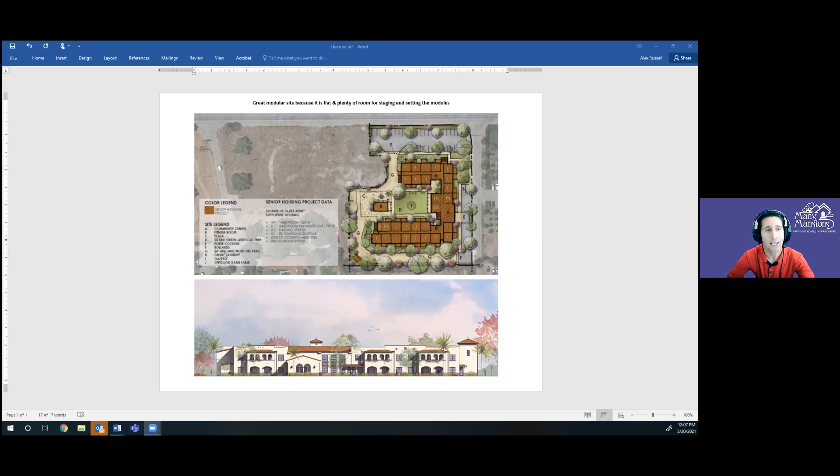There's a lot of things that we're still learning about it as we go. And part of that learning process has actually been working with Prefab Logic and Lana and her team, who are experts in the modular space and are really helping our team work through this process and make sure that we're successful. So I'll turn it over to Lana, and you guys enjoy the presentation.

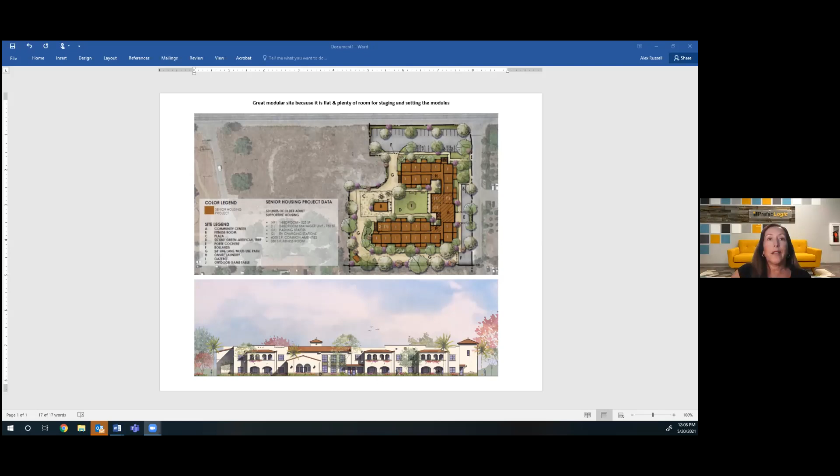Thanks. Lana, your turn. Okay, well, Alex already covered it all, so I'm done. I'm just kidding. Here we go. All right, can everybody see my screen? Am I sharing? Yep. Okay, good.

We use Teams, so switching over to Zoom, sometimes I'm a technology goofball.

So, okay, my name is Lana Cook. I'm with Prefab Logic. I'm the business development manager here. We are an Idaho-based modular pre-construction consulting firm. I am based here in Southern California. I am working with Many Mansions and a number of other folks on a modular project and modular projects.

And I'm just going to give you a little talk today about what it is, what we're doing, and sort of the progress of modular going forward.

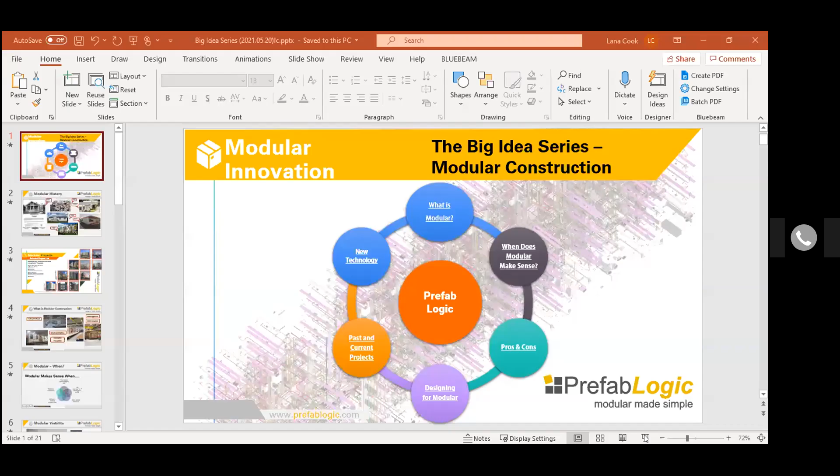So let me see why my pages aren't changing. Sorry, we're having a little technological issue. Are you guys seeing anything? Yeah, we see the initial screen. Yep, it is not changing. That's so strange. Bear with me for one sec, folks. Sorry. There we go. Okay. Hey, Alex, are you still screen sharing? For some reason, it won't release it to me. Thought that might be the issue, and I checked, and it does not look like I am screen sharing. But let me check. I have a red light. How's that? Oh, that's better. Or at least I can see. Yay. Okay. Are we good? First screen, are we good? First screen, yes. Okay, good.

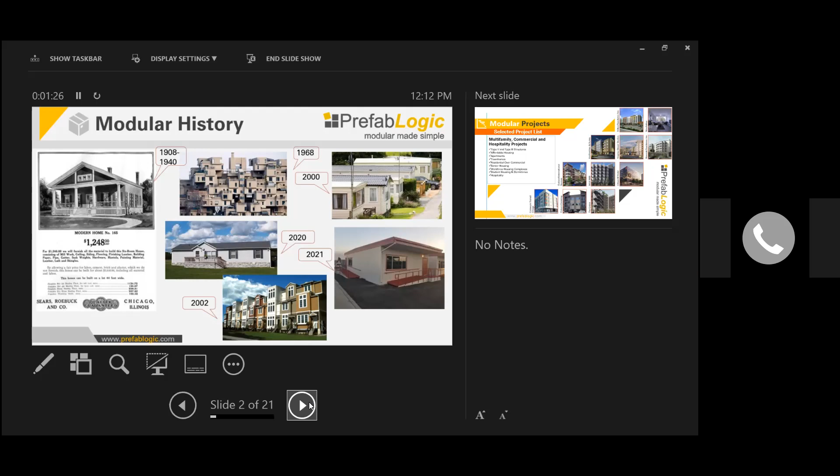That's current. And if you look way down at the bottom, that is a project that most of our team worked on back in 2002. Those are townhomes in San Jose that today sell for upwards of $1 million. So modular in the world that I live in today has been around for 20 years. So it's not new anymore, but the process is evolving and we're happy to be part of that process.

And so for what we do today, we've developed projects with clients that range from hotels to apartments to workforce housing, townhomes, slab on grade buildings, over podium, student housing, you name it, we've covered it. It's wood frame construction, type 5 and type 3. And really that means I can go single story to 5 stories over podium with this sort of volumetric mass produced product.

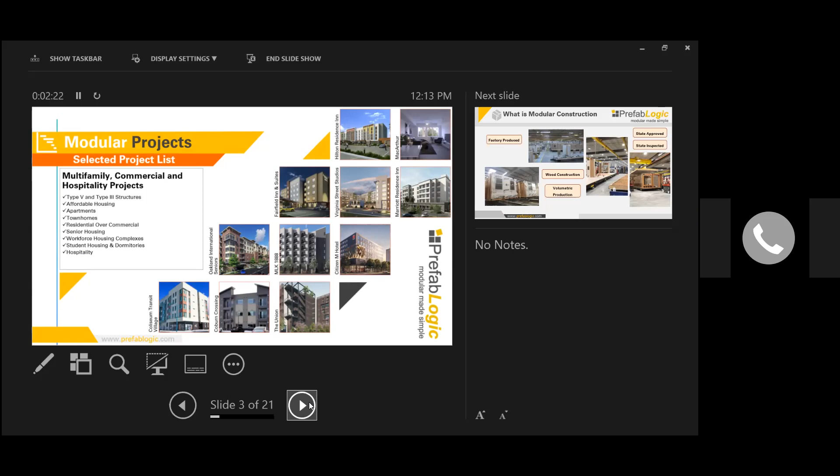So we're not talking about single family homes. We're not talking about manufactured housing for single family. We're not talking about panelized or kit products or SIP panels. This is truly a full 6-sided box, mass-produced type housing product.

So in terms of modular in my world, and we're all going to stay in my world today, this is a factory produced product that is under the jurisdiction of the state of California. So any state that the product is going into, the state is the jurisdiction. So the state does plan check and approval, and they do factory inspection and approval of the product as it's being built. Again, wood frame, and this is volumetric production.

So what that means is, kind of envision in the back of your mind the Coca-Cola plant, moving the Coke bottles through the production facility. All the Coke bottles are the same, and they're produced on various stations along the way through the production line. That's how this product is built.

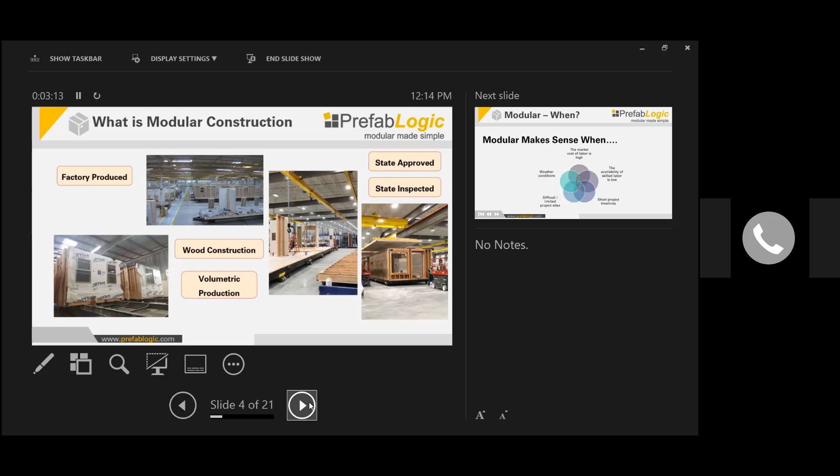This is not, we call it lots. There's a lot of slang terms for placing a module in the center of your plant and then bringing your workforce to that location, and then all of the workforce doing different trades. That's not this process. This is moving it station to station. And each station does one piece of the puzzle, so to speak. So volumetric production, wood construction, and under the jurisdiction of the state.

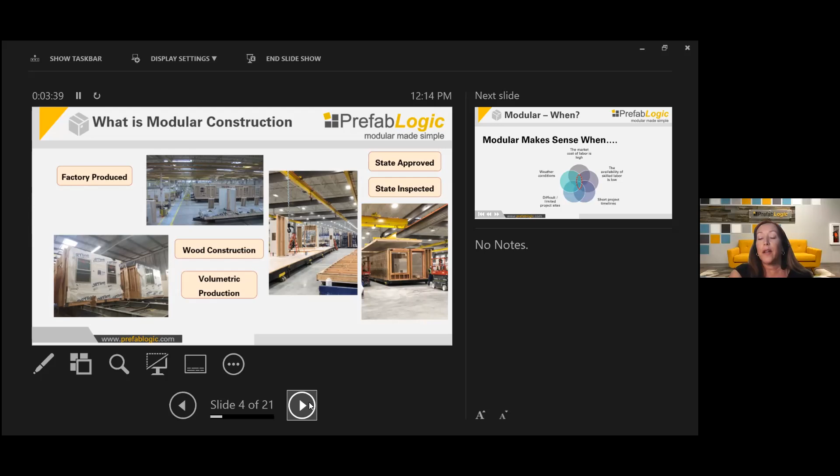So modular really makes sense when the cost of labor in the local market is high, and you want to make sure that there's a delta between the factory labor rate and the field market rate. Sometimes those are on par, but if you're looking for a cost differential, the biggest swing is the difference of the cost of labor in the plant versus labor in the field.

There's also markets where the availability of skilled labor is increasingly more challenging. And I can tell you that Salt Lake City is one of those markets where the boom of housing has surpassed the availability of labor in the market. So it almost doesn't matter anymore what the project costs if they can't find the people to actually build it. People have in their mind what things cost until there's no way to get it done.

So modular really makes sense where the availability of trades is limited, and we all know that after the recession, so many people got out of the trades, and we're now dealing, especially in Southern California, with a smaller pool of subcontractors. So when those subcontractors are all busy, modular moves some of that work away from the subcontractor and into the factory so that fewer subs are needed on site.

Modular also makes sense when project timelines are short. You have funding deadlines, you need to get vertical quicker. Alex mentioned getting housing in the market sooner, quicker. Modular is a huge part of that. The typical modular project shaves off about 1/3 of the schedule, and that's in projects ranging from 50 to 300 units. We can usually shave about 1/3 off the overall construction schedule. In addition to that, we can shave off at least 1/4, if not 1/3, of the actual pre-con schedule, which then is, if you can shave off a year of your whole construction project, it's a win all the way around.

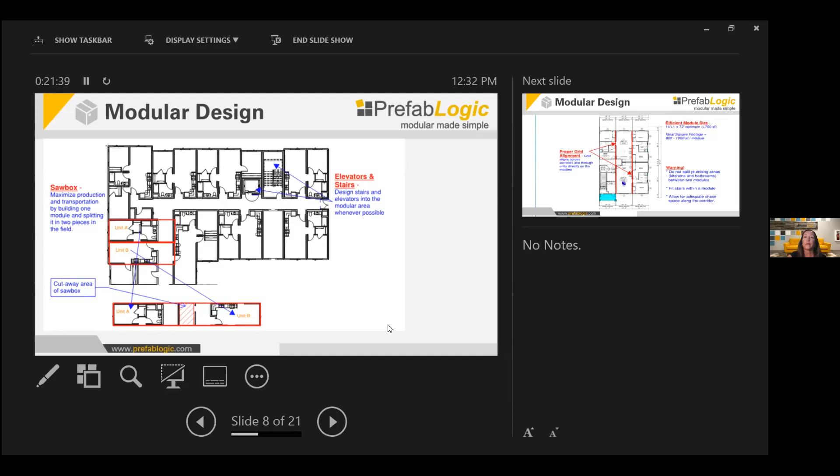And then grid alignment is key. Again, designing within that rectangular box, making sure plumbing like kitchens and bathrooms never fall within that magic red line you see on the screen. And making sure that, again, we're really focused on how is the factory going to build this? Do we have access where needed to align chases from floor to floor.

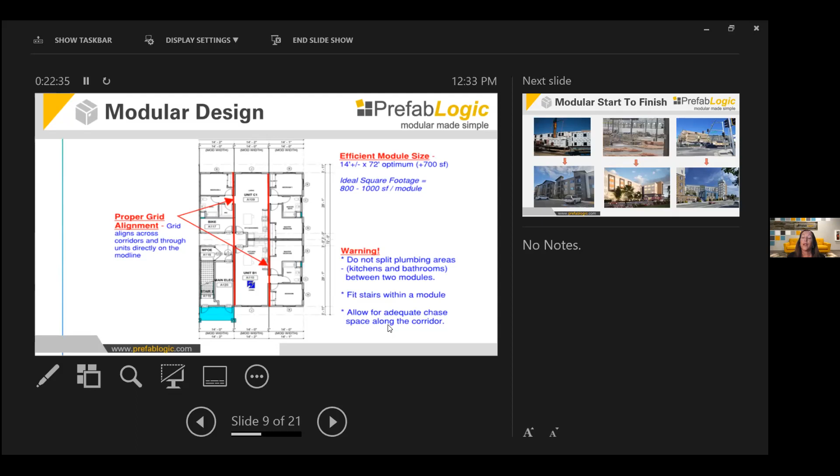There's things that have to be thought out much earlier in the process in modular because there's no tearing apart walls. They're all finished so that you can make a connection in the field. Or we missed a pipe and we've got to find a way to get it from one floor to the next. That doesn't happen in modular. We solve those problems early, but a lot of it stems back to design. So if the design is modular friendly, your economics will start to make a whole lot more sense and the project and the product will become much more efficient.

And then here's just a few projects in various stages. Across the top row, this is what a modular project looks like when it's going vertical and they're picking from the crane and putting each piece into place. Yes, the whole Lego theory is really true. And that's the units are finished on the inside. So these apartments, this is an affordable housing project on the left. Apartments are finished with flooring, drywall, tape, texture, paint, cabinets, counters, light fixtures, ceiling fans, appliances, and then the outsides are just about unfinished. The bottom picture is the completed project itself.

Balconies are built in. Everything we possibly can build in at the factory, we want to build in at the factory and leave as little to be completed on site as possible. The middle project is a view of apartments in an automated manufacturing facility before the framing pieces have started to be put together. So the robotics have already cut all the pieces. Each one of those stacks of lumber you see are either roofs or floors, and they're tied to specific units, which eventually, when they're all created and are stacked in the field, will look like the building at the bottom of the page in the center.

And then the picture on the right is vertical set of all the boxes on a project in San Jose that is finalized as far as the crane set goes. And in roughly 4.5 months, it's 301 units. It'll look like the picture at the bottom. And that project's underway today.

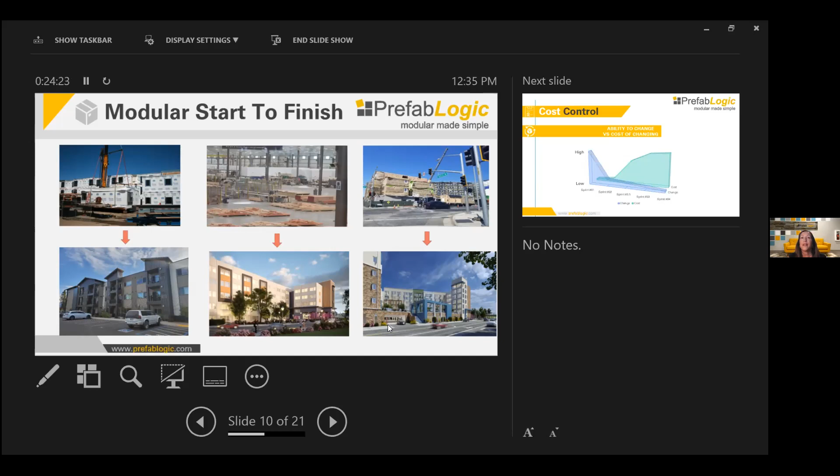And then modular, as I think I mentioned, there's no design build. And I know that every once in a while somebody slips past me and goes, oh, but you can do this. But really in modular, we want to plan in advance and decide and pick colors and specs and get to design lock early so that so many of the other things that happen behind those items can get handled more quickly than they would if we were making changes late in the game.

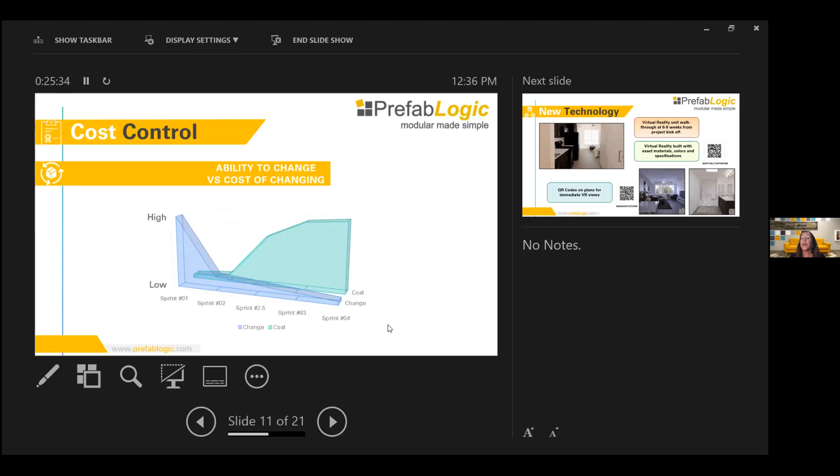And what that does, if you make all of your decisions early, should you have any cost impacts, the cost impacts will be low for changes in modular made early. So we have a sequence, we call it our sprint model. And we have a sequence that says in sprint 1, if you make changes, the cost of those changes is very minimal. If you wait until later, after we've gone for state approval or after the factory is getting ready to build and you want to make a change, it's almost like starting over and the cost becomes huge. So make your changes early, very little impact in cost, make them late, and there's a significant impact in cost.

And then we like to say that we're on the cutting edge of technology in modular. We really have started doing things, that's kind of the premise of our company, different than the way modular production has been for the last 30 years. So we're using things like virtual reality. 6 weeks into a project, we're starting to do unit walkthroughs. I mean, in a conventional project, clients typically haven't even picked their cabinet color by 6 weeks in.

We also, when we do our state submittal plans, QR code all of our drawings so that if there's an inspector, let's say a CASP inspector is up at a manufacturing plant and he wants to see what this unit's going to look like when it's finished, because it looks very different when it's in the production line, he can scan the QR code, hold his tablet or iPhone up to the wall that he's looking at while he's doing the inspection, and he can actually see how that, say, kitchen section or bathroom counter will look when it's finished. And he can see that the factory is building it the way the plans read.

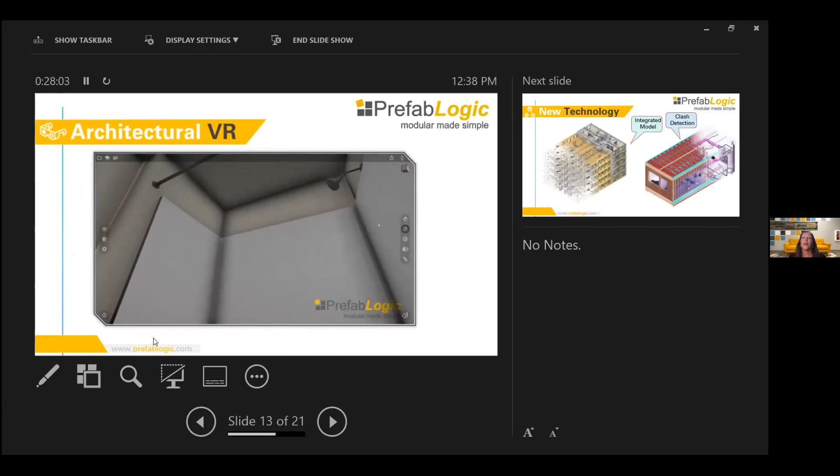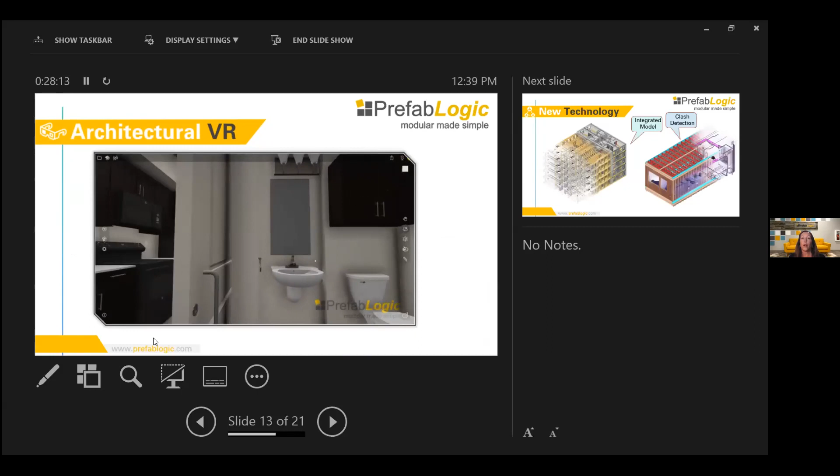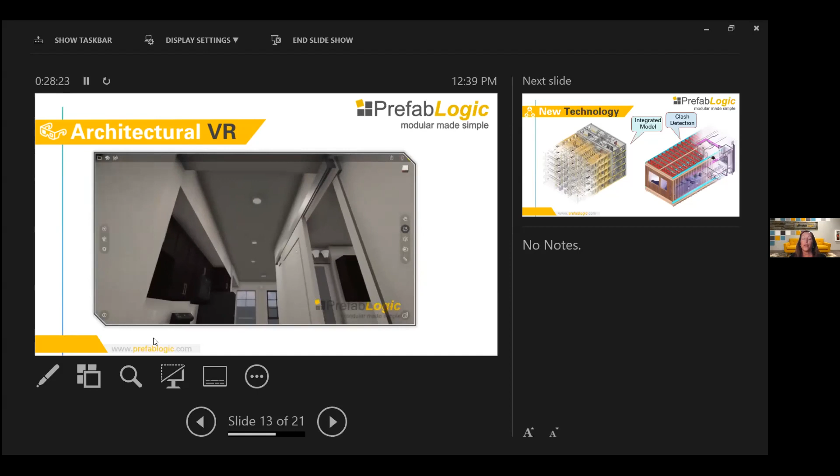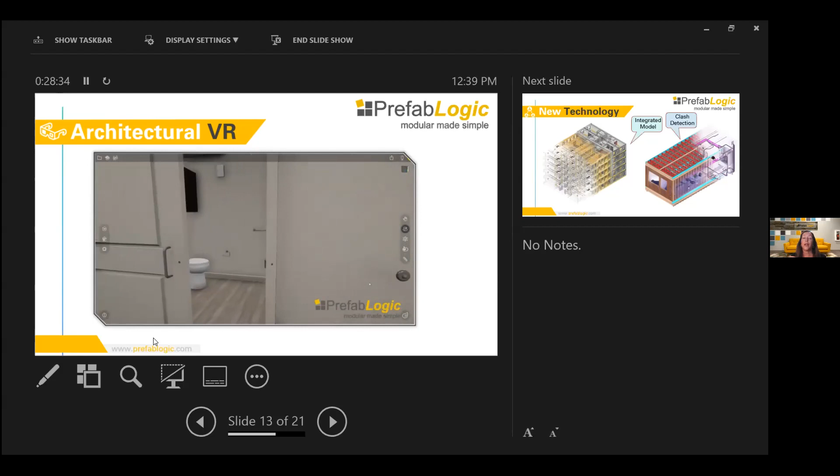And this video goes a little fast, but we do this with every project we go through pre-con on. Every client does this once, if not more, where we've put each unit plan into VR for the entire project team to walk through. So instead of waiting till your project is going vertical and your units are being finished and you decide that you don't like where an outlet is located, or that soffit didn't look like what you were expecting, you can actually see your whole project. Again, this happens maybe 60 days in from project kickoff. So really, really early in the process.

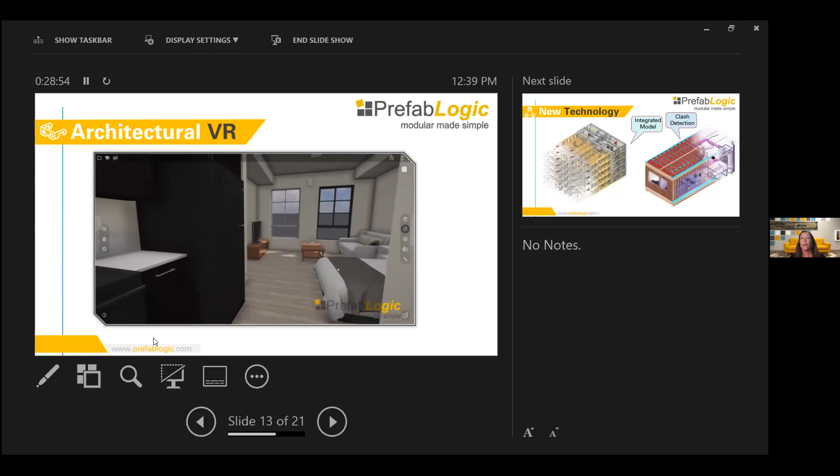Let's say you didn't like how a linen cabinet didn't come out as far as your kitchen cabinets. You'll be able to see that early, long before material gets ordered. So making changes, this is the time. We want to encourage that early in the game.

And this video will run for a while. So let me see if I can get past that. There we go.

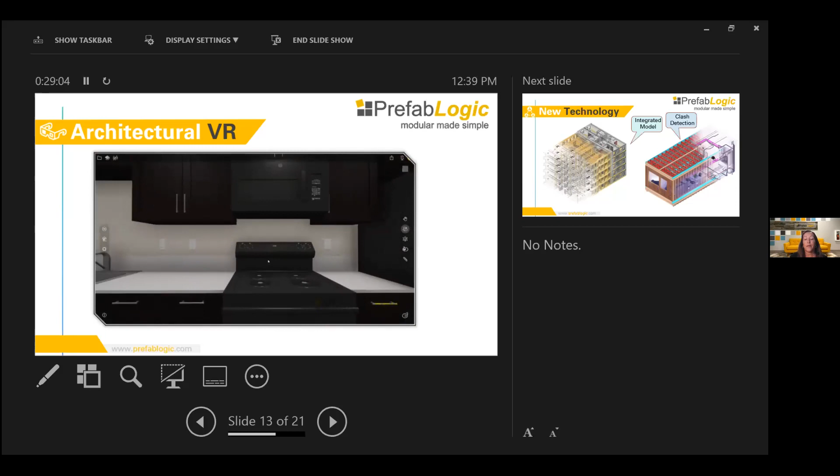So in modular, the old days of building modular was your architect would create a building plan. We would look at it from the factory perspective. We'd go, yeah, I think we can build that. The idea of a factory is to keep your production line full. So you almost don't care what you're building as long as your production line is full and your employees are working. However, if a project becomes unprofitable, it's a completely different story.

And if you're not sure, then factories tend to just add money to the cost of the product. They don't really know. So what we want to do in our world is we build a full integrated model. And that is MEP, so mechanical, electrical, plumbing, fire, low voltage, framing, all the structural connections. And we build in every single detail, and we design to a level that is, in our world, very high, level 500. So we're getting into modeling everything except screws, nails, and fasteners.

And then we run our process through a clash detection software so that we can tell if a plumbing pipe conflicts with a floor joist. I have actually been on projects where I've seen people cut through floor joists because you're never quite sure where that pipe needs to fit. We know where everything needs to fit.

And some of the stories of modular projects that have kind of fallen off the rails or haven't gone as smoothly as people anticipated, it's because back in the day, factories built their shop drawings and their state approval packages from architectural drawings. And architectural drawings just aren't enough to get into the weeds of how we're going to take apart that 5-story building, build it at single-story level in a production facility that moves every 20 minutes. So it's really taking apart that 5-story building and taking it all the way back to the design stage and doing it from a very, very intricate level.

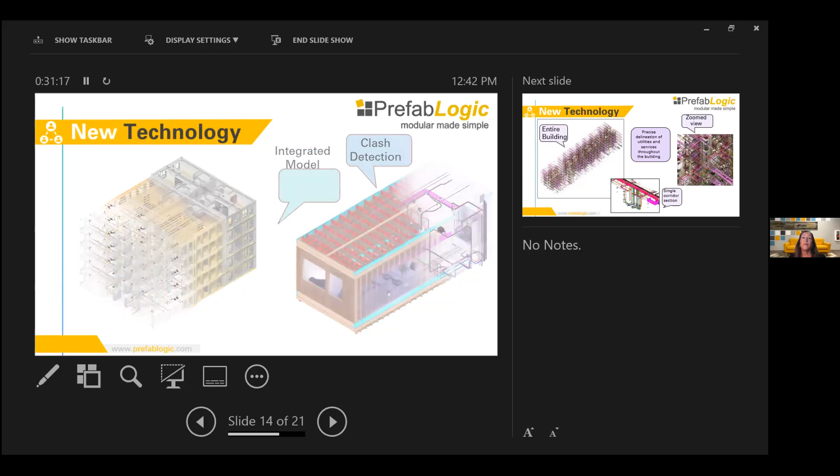And then, just to be a little more descriptive, the funny looking picture on the left is a full building that is in production now. Everything that's turned off in this drawing is framing. So what you see in that cluster of colors that looks like chaos is mechanical, electrical, plumbing, fire, and low voltage in a building.

So there's a whole lot of stuff happening within a building that we really need to know where everything runs so that when the factory builds it and it then ships to the field, the contractor can connect it on site with ease, that we know where every pipe and piece goes, that we know where every structural connection goes. It's a very intricate and detailed process that I think the general public thinks you can call up a factory and order a building and it's just going to come out the way it comes out. There's a whole lot more that goes into it to make it flow seamlessly.

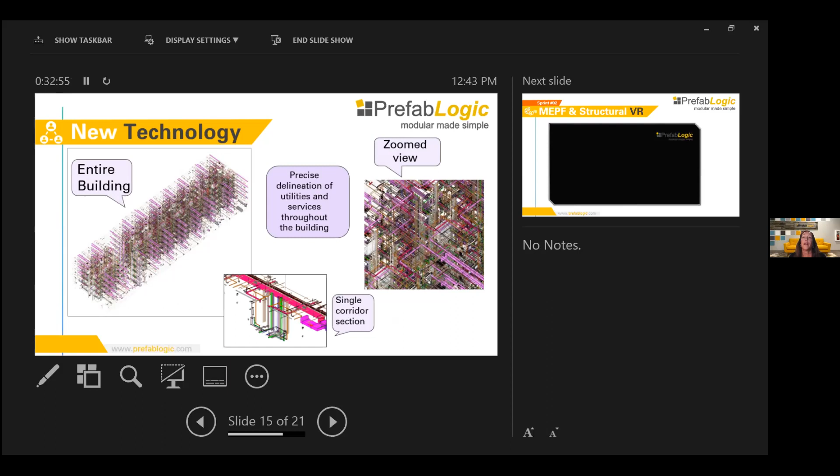And so there's just a zoomed view on the right and an even more zoomed view. All of that chaos at the bottom in that bright colored picture is what happens for connections for one apartment on one side of a corridor in one piece. So let's just call that a studio apartment. That's all the magic that happens in a studio apartment. We know where all the pipes and parts and pieces go so that the client and the general contractor handling that product for the client gets a quality product they can connect easily in the field.

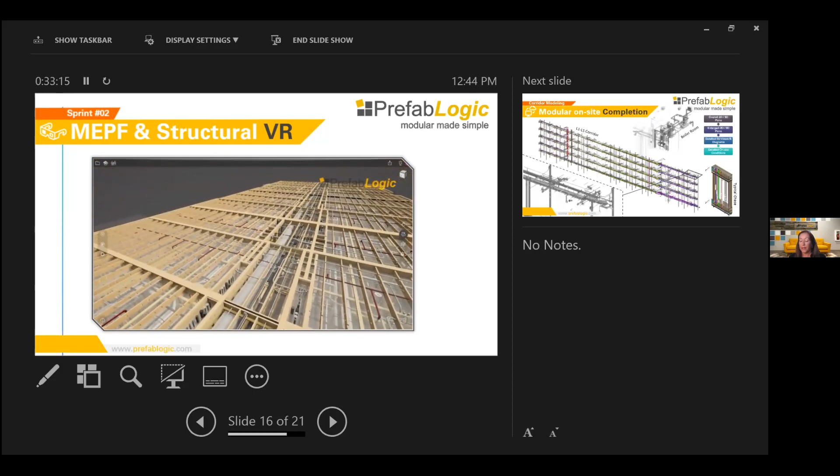And then taking that to the next level, when a client wants to see their project built, these are the stages at which we're reviewing plans and going into detail, both with the state plan check agency and the contractor and the client, to make sure that everybody knows how the building is coming together so that any problems can be solved early. This whole video is done in our process long before a product goes into production in the factory.

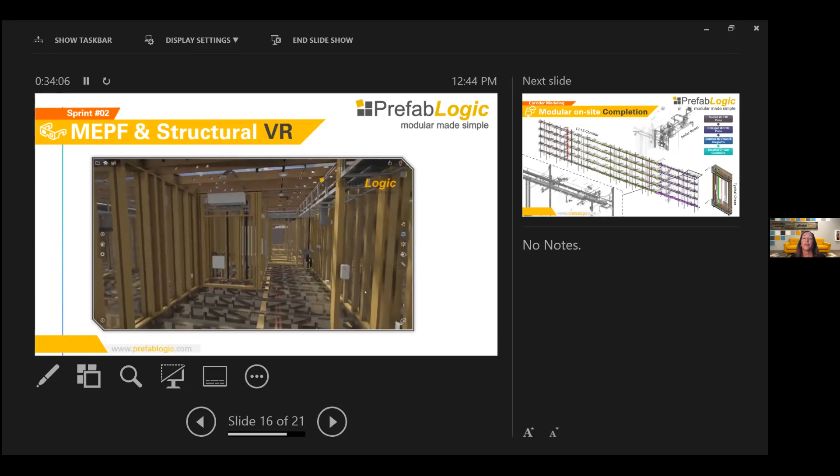One of the manufacturers we work with is automated. So every pipe you see, every hole that has to be drilled through every piece of lumber, all of that has to be defined. If you don't tell a robot what to do, it won't do it. It doesn't think on its own. So we have to make sure that we're detailing this early so that then through the layers of software, the machines know how to cut that material and how pipe will fit. You can see there's a whole lot of connections and a whole lot of things that happen behind the drywall. And for us, this is really where the magic happens.

And in the old days of modular, there's a little bit of a disconnect in that the factory and the state are responsible for what's built offsite. So the state approval agency is inspecting what's built in the manufacturing plant. What's not built in the manufacturing plant are the connection of all the utilities in the corridors, their laundry rooms, and in this case, a boiler room. There's the plumbing and pipes that happen in the utility chases once the product all comes together in the field. So that becomes the jurisdiction of the local community.

So you've got your local plan check or your local building inspector out inspecting things that aren't necessarily on one set of plans, because the architect is responsible for the local plan, and we're responsible for the state plan, but the corridors are kind of that gray area. The structure is built one place and the connections are all done in the field in another. So this used to be a gray area where it left the door open for problems.

And in our pursuit of trying to make modular easier, make it more understood, make it more price competitive, make it easier for general contractors to then get true and accurate numbers for their subs, and then you have the trickle down effect, and making it faster and easier on site, we're doing all of the plan sets that normally would not get done. This would just get built to code in the field, and the contractor would end up having to figure out how it all comes together.

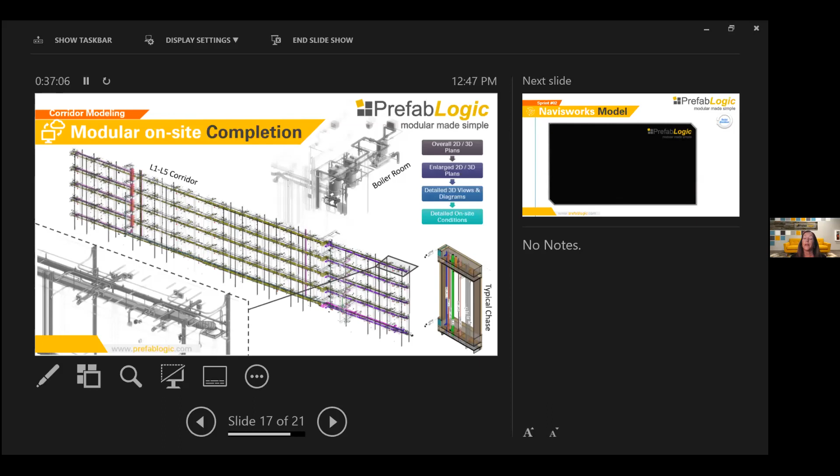And I think with this done, we're seeing with our clients today that their projects are even going faster. And I'd hate to be optimistic and say, oh, we cut another third off your timeline. I do know that it saves an enormous amount of time, but we haven't run the analytics on it yet. I should know pretty soon. But we're starting to see significant cost efficiencies, a lot more assertiveness from the contractor pool. The general contractors are more understanding of what they're getting with modular and how to price it, and it has a trickle down effect to the clients.

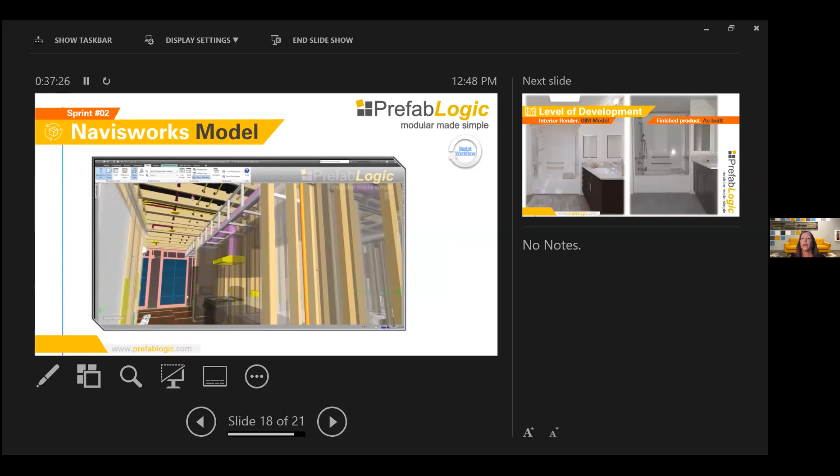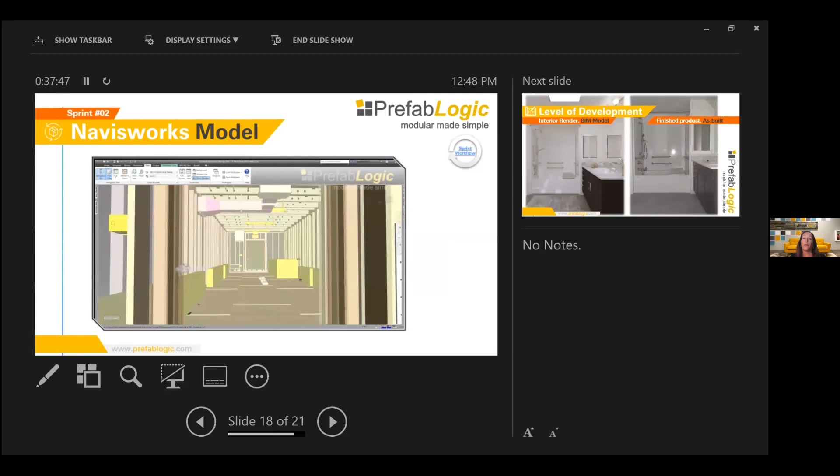And then our clash detection model, again, we're kind of getting into like the cartoon world, but this is really what we do on every project when we're running clash detection to make sure that what the factory is building will actually function in the field and that everything will tie in seamlessly, and that modular really can be an easier and more effective product to work with in the field. This is all part of the process, and it really has taken using software. And in order to use this kind of software, we really have to develop the project early and with a really, really high level of precision.

And then in our process, when I spoke about the VR, on the left is a VR rendered picture of a bathroom, and on the right is the actual finished product. So you can see they're relatively close. And so we're really proud of the work we put in early in the process to make sure that the product that's being delivered in the field is what everybody saw early on and what everybody expected.

And then taking modular one step further, this is really going to bring it all to the end here. And that is in our years of doing this, we've been banging our heads against the wall, trying to figure out how we could make modular more cost effective, faster, more efficient. And we went back to that whole saying of, can I just build a building that you've built for another client before?